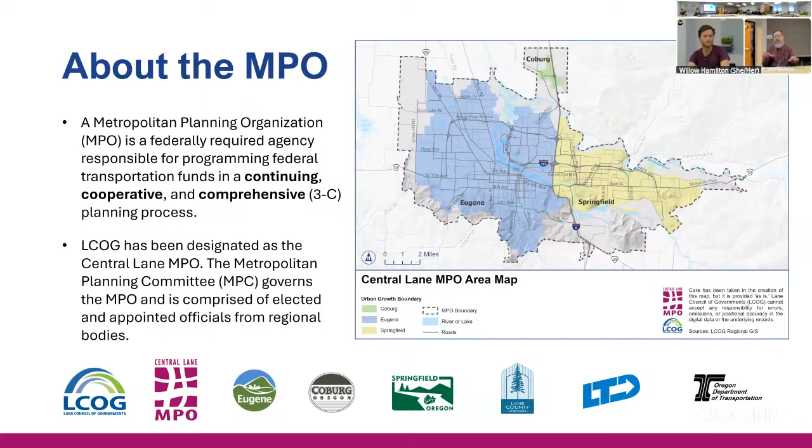So LCOG has been designated as the Central Lane MPO. That happened back in the 70s, and we're governed by what's called the Metropolitan Planning Committee, MPC. It's comprised of elected and appointed officials from the region. We have board members from Eugene, Coburg, Springfield, Lane County, Lane Transit District, and representatives from ODOT are there as well. For the city of Eugene, your mayor, Kaarin Knudson, and Councilor Randy Groves are the two representatives on that board, but there are also other committees associated with the MPO that has staff on there, like Rob. So there's a lot of input from the local agencies on what activities we do.

So why are we counting bikes and pedestrians? The number one reason is to understand how people are traveling around the region. We have a lot of history counting where vehicles are going around the region. Counting bikes and peds is something that's a little bit newer.

One of the priorities that's been noted by MPC is more safety, which comes as no surprise to this committee. One of the ways this helps with safety is to understand what that exposure is to bicyclists and pedestrians on our transportation network. If we know where they are, we can get a better sense of where we should be putting interventions. The bike ped counts also supports grant funding applications for discretionary grants.

Those are funding sources where you have to put in an application and compete against a statewide or federal setup, as opposed to what's called formula funding, which just comes to the region or the state and we get a set amount that we know about.

There are program reporting requirements. CMAQ is congestion mitigation and air quality, that's another acronym. That is a funding source intended to help address vehicle congestion and associated air quality impacts. As part of applications and reporting for that funding source, you need to demonstrate that you're actually reducing congestion and dealing with air quality. Having bike ped counts for the area, either before or after, help with that reporting requirement. These counts also help with outcome evaluation.

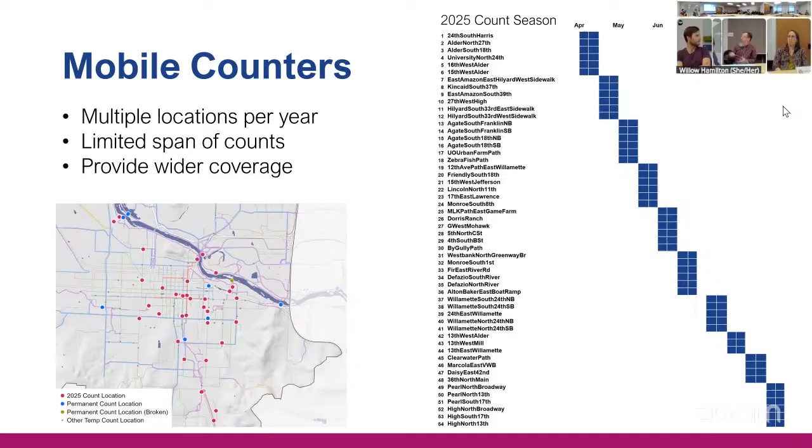There's a little map on the left of the count locations we did in Eugene - we also counted in Springfield. The mobile counters are really helpful in that they let us count on a lot more facilities, but we get less data each time we do. We have a rotating list of locations for the mobile counters.

It was initially put together in 2016, 2017 to help with model calibration. Our staff member, Josh Roll—which I feel is the best name in transportation planning, combining both Josh and Roll—now works for ODOT in their transportation planning and analysis unit.

He did a lot of great work for LCOG. What he did is look at a bunch of regional streets of all types and try to pick a representative sample so we could count everything from a quiet neighborhood street up to busier streets with maybe a striped bike lane, to get a sense of how people were using different types of facilities around the region. We've generally been rotating through that list.

We've had to make some adjustments over time. The mobile counters have to be placed carefully with thought. One of the things you have is this little box that holds all the hardware, and that's got to be attached to something so it doesn't just walk away. Over time those anchor objects have disappeared—sometimes trees get cut down, sometimes a sign gets moved, or the road gets reconfigured, or the surface deteriorates and becomes too rough. Or we just find a particular location is, for whatever reason, subject to more issues than others.

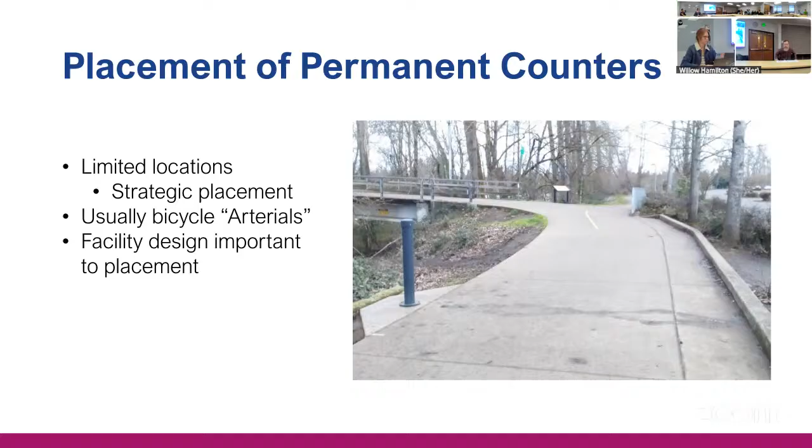Josh, I was wondering how sophisticated are these detection devices? Can it detect something like a bike trailer, or can it tell the difference between multiple bicycles going across at the same time, like if they're going parallel?

Yeah, they're fairly sophisticated, though it depends a bit on which counter we're talking about—the technology has improved over time. We have one mobile counter that will actually count both bicycles and vehicles and is really good at capturing the difference. Most of the other ones are really good at bicycles but not so great at things like skateboards, or a bicycle that's a long-tail with a longer wheelbase—sometimes those don't count as well. But they continue to improve them.

When we get to the end of the presentation, I can talk about some of the newer technology options we might be able to upgrade to, if we're interested. Thank you. Alan?

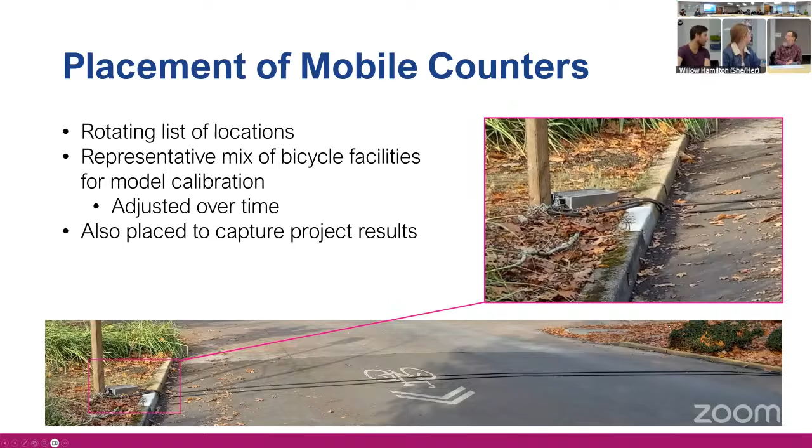So I'd say that in a few key locations, expanding permanent counters makes a lot of sense. But the mobile counters let us be a lot more nimble and go where the interest is for the next planning project, or model changes.

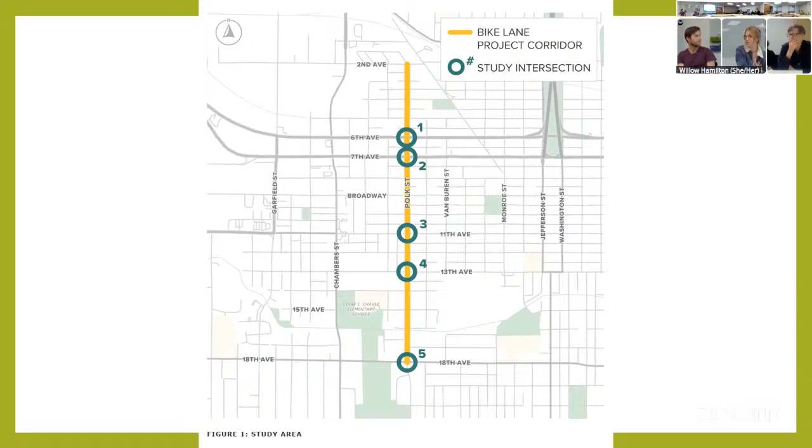We looked at 5 intersections: 6th, 7th, 11th, 13th, and 18th. Those are the 5 signalized intersections on Polk Street. Each of them has a turn lane. So this is Polk at 6th - here's where there's the through lane and the left turn lane to get onto Polk, and then here there's a through lane and a right turn lane to get onto 6th from Polk. So this would be the space where if we need to put a bike lane here, we'd have to have a through and left turn lane to create space for a bike lane.

Same on 7th, but different direction. So, the light at 6th and Polk and 7th and Polk is so short - do you guys take that into account, like two cars get through and the light changes, and then you're sitting there for a long time? And for a bike or a pedestrian, same thing - you're begging the button. So do you guys take into account the time people are going to have to wait to get across these pretty major streets?

Yeah, so that was part of the traffic analysis - existing timing. When they gave us the intersection report, just to zoom out for a second, we have not made any decisions on this project or what to do with the intersections. We have gone back to DKS with requests for further analysis - your point exactly, like what would happen if we change the signal timing? Because it is really short. And if it's really short and now there's more cars in a single travel lane instead of two lanes, or bikes in the middle, what does that all look like? It's all modeling, so nothing's a perfect science, but we've sent it back to DKS for further analysis, and I can review what that analysis is.

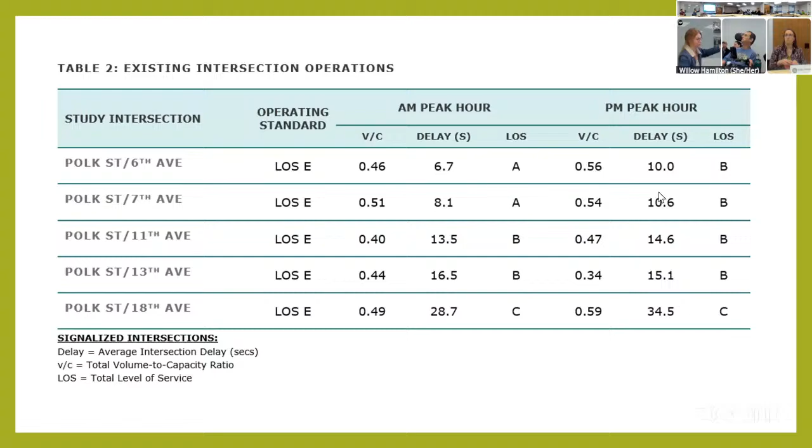So this is existing intersection operations. This is a little wonky, but the operating standard in Eugene is that our level of service is E. We basically try to make sure all of our signals are meeting at least E. The one thing that can be below that is F. If a signal intersection is F, that doesn't meet our operating standard. So we're always trying to get them at E, the minimum.

Currently, Polk at 6th, 7th, 11th, 13th, 18th are A, A, B, B, C for AM peak hours. The level of service, the letter, is just basically the amount of delay that vehicles experience. So that's why you see 18th has 28 seconds of delay, it's a C, whereas 6th is only 6 seconds, as an A.

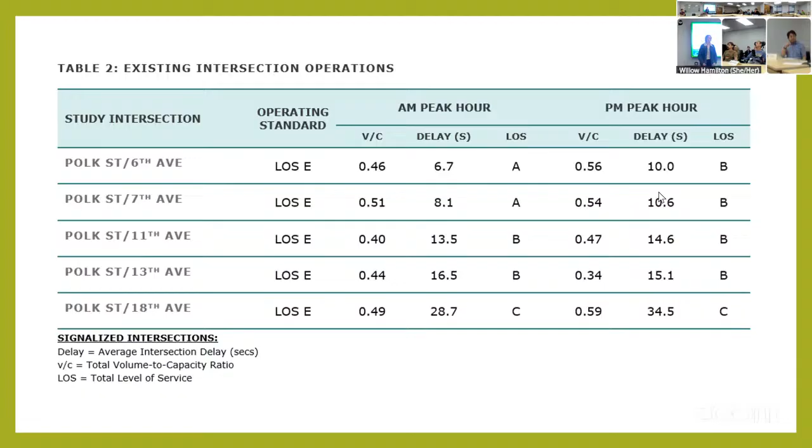So that's really what it's based on. They kind of relate to each other. In the morning, people have about 6 seconds of delay, that intersection's an A. In the afternoon, they have about 10 seconds of delay, that puts it at a B. The 18th intersection is the busiest intersection on this corridor. It's kind of interesting that it just gets busier as you go south. That's what we saw with our volumes as well.

So this is existing conditions. It's because 18th is the only street that goes through all of town south of 6th and 7th. Yeah, totally. And 18th is like a whole other can of worms that one day we need to address.

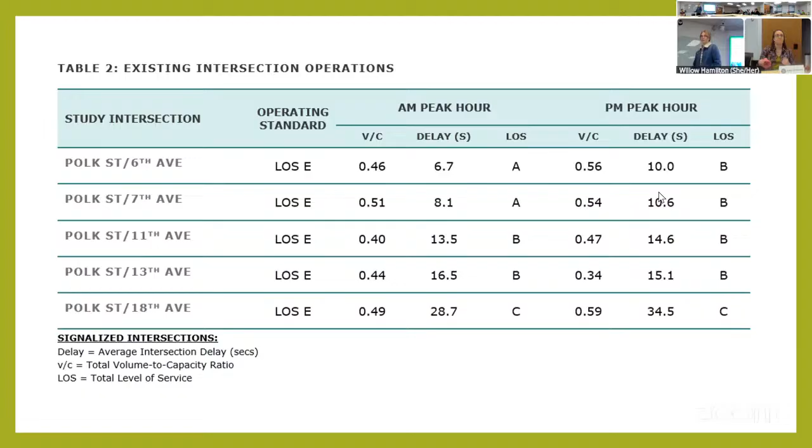Okay, so I just switched over. This was table 2 with the existing conditions. This next one is table 3, we call it build conditions, but what that means is, what we're asking is if we removed turning lanes, what would happen to the level of service for people driving?

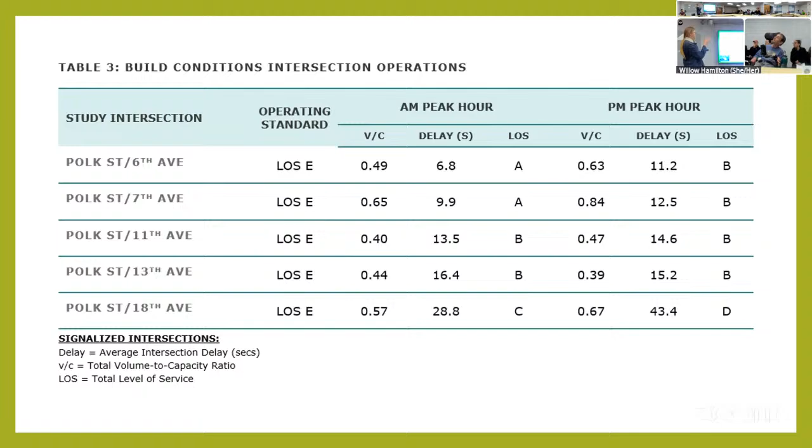We didn't see much change in the level of service. So if I flip back to this, AABBC, AABBC, the level of service remained the same if we were to remove the turning lanes, which came to my team as a bit of a surprise. Polk Street is not a major driving thoroughfare. It is an important access route, but we're not seeing super high volumes on there that would be impacting these.

This level of delay is averaged across all of the vehicles going through that intersection. So what that means is the north-south on Polk Street is being averaged with all the cross traffic here. And since there's a lot of cross traffic this way, it does bring that average down for delay.

So basically what we're looking at is kind of a green light, like we could probably remove the turn lanes, but we want additional analysis because the signal timing is really important. And right now the greens are so short that if we just pulled those turn lanes and didn't change the signal timing, it could create backup, and we don't want to do that. So how can we adjust the signal timing so that it's working the best it can for everyone?

And this is all contingent on if we decide to move forward with the bike lanes project at all. So that's all sort of coming together. We have pieces, but no decision has been made. Eventually, staff will put together a memo to leadership.

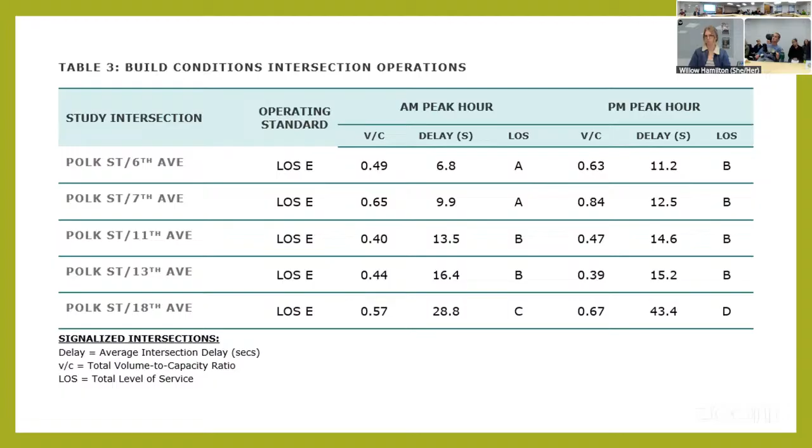We'll say here are our findings, here's our staff recommendation, and then leadership ultimately makes a decision on how the project moves forward. I think that's my update on Polk Street.

Is leadership the council? No, leadership is the city engineer - right now that's Doug Singer. I always get Doug Singer and Doug Rubel mixed up, but Doug Singer is the city engineer right now. Depending on how Doug feels about the project, it could escalate higher to the public works director, or even city manager or assistant city manager. That's as high as it could go.

Good question, but not council - council doesn't typically make decisions on transportation projects. Do we have a public works director now? We have an interim public works director - Lacey Ridsdal is the interim public works director.

Well, thanks, Willow. Just wanted to keep you all in the loop on where we're at with Polk Street. It's good to know, and we'll continue to be interested in how it moves forward.

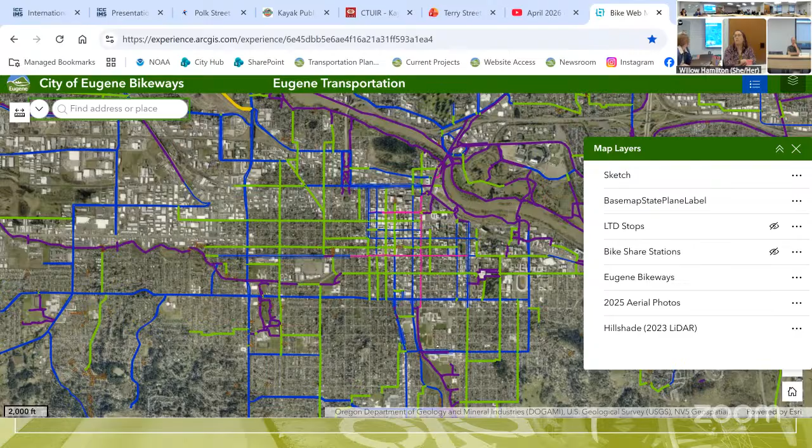My question for you is, are you thinking about how you're connecting to something like the Fern Ridge Path? We haven't had that conversation yet, but I think that's the question—how is that going to work?

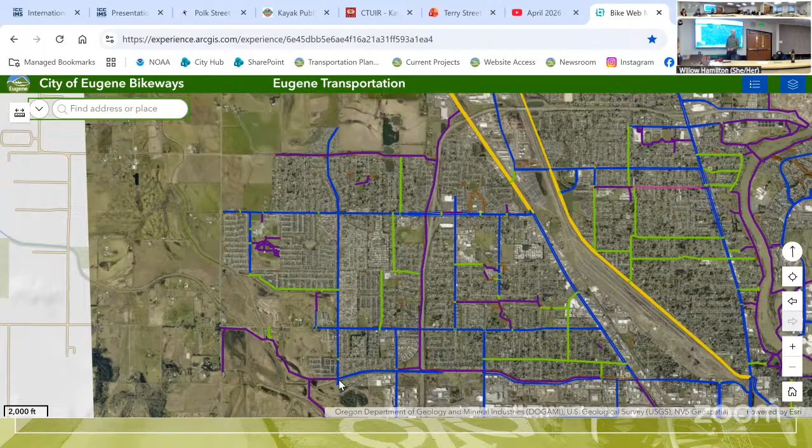The Fern Ridge path only goes to here, and the park is all the way up there, so that's a big gap. I think the question is, someday there has been talk about extending the Fern Ridge path—that's something we'll talk about as part of the transportation system plan. That would be really expensive, and maybe more of a recreational connection, though it could tie into some of the neighborhood here.

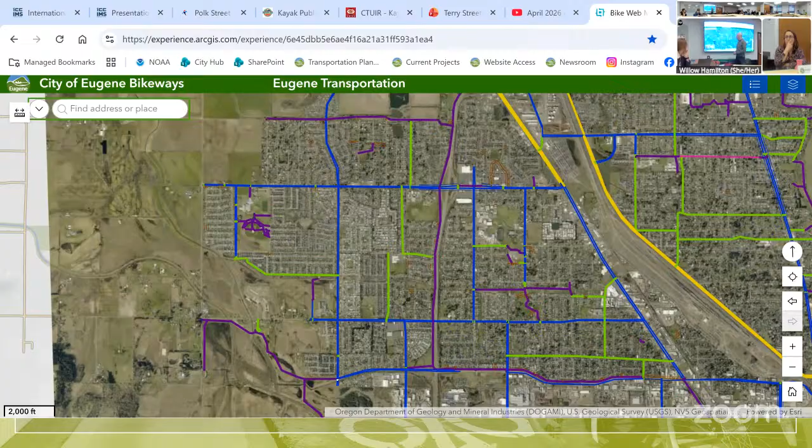Here's the road where the clicker is pointing—Terry Street already has bike lanes, though it's not particularly friendly for cycling since it's not protected and carries a lot of traffic. There are some weird chicanes on it that, even though they're generally considered an enhancement, may not feel good, so we could look at improving that.

I actually did a weird rotate there, oh my god. Right, a whole lot.

Move on to Carl's question, or are you trying to point something out there? No, let's just move on. Trying to pan and then deciding to rotate instead. We could just go back to the sliders.

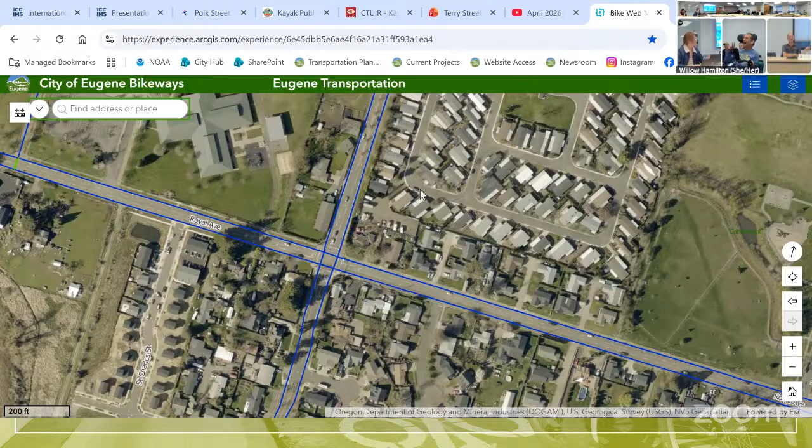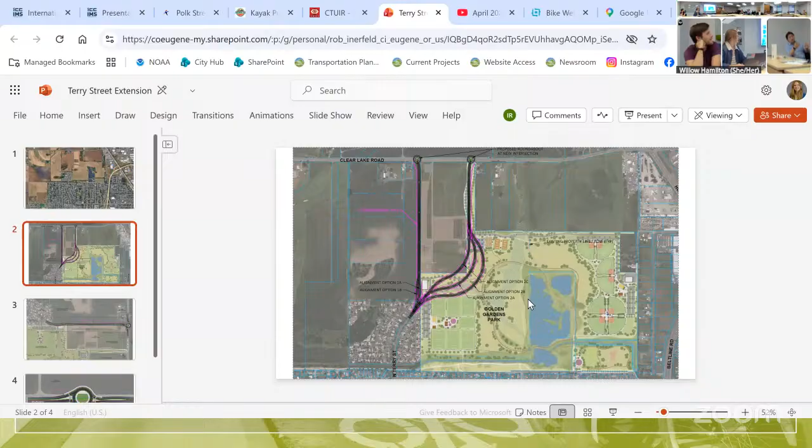Carl, what's up? First, I want to give credit to Rob, who was very persuasive and got me to join ATC. But my question was, if you could go back two slides - yeah, this one - were you proposing it's one or the other, like there could be one more direct path going from the park and Terry Street, or could both of these exist at the same time?

No, we would only pick one of the alignments. I think the parks folks probably want us to pick the one to the west, because that doesn't cut through the areas where they'd like to see park. There might also be, I'm not sure, but I think this cross section is actually wetlands, which could be more problematic because the street would have to go through wetlands, whereas if we just go straight north. So there are pros and cons, or even obstacles, for each of them.

If you're looking for feedback, I'm always a pro person when it comes to having some kind of shade or greenway situation, even if it takes me a little bit longer, just because on the days where I really need it, that helps a lot. So if that's feedback, that's mine.

Well, street trees are definitely something we integrated into the street design, and there are great street trees along part of Terry leading up to this. Oh okay, because it actually being on that street - it just looks so desolate to me. I know, right? Beyond the end it's just fields, I think, but up to that point it's good.

Can I ask one more quick question? Sure. Is this - I think I heard someone say this could be part of a plan to eventually get to the airport? There are plans to continue Terry all the way up to Airport Road. Oh okay, great. I'm a little dubious of that, just because you have to get through some of those industrial properties. Just as an aside, Lane County I'm pretty sure got funding from the MPO to do a safety study of Green Hill Road, so that's something else that's going to be happening.

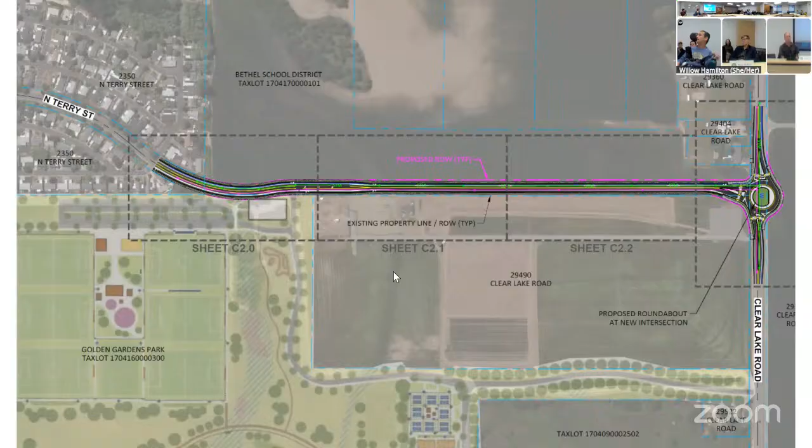So, I have a question, and maybe the best way to do it is if we go back another slide - yeah, this one. This area in a way already has some great bicycle connectivity, things that weren't mentioned earlier. You have the Justin multi-use path here, which connects the Beltline all the way across Terry Street and beyond.

You've got the Beltline path that comes all the way up here to Jerry's. Terry Street goes down, as we saw earlier, and connects at Roosevelt - not right there, but another couple of blocks up past Beltline has a separated, protected path. And then, of course, it connects over to the Fern Ridge path too. Terry Street, as a whole, is really this key north-south artery tying together, kind of completing a square here, as a major arterial area around the northwest.

Plus, this is pointing into this Greenfield UGB expansion, and it just seems like a real opportunity to think about how we can have - these other paths are all protected - how can we have a protected experience on this one side on Terry Street?

I also think about two other things related. One is - someone just mentioned this is a long way out here, it would be a long ride - but it's not if you live in Bethel. If you live in Bethel, you're right here. And in fact, if you live in Bethel and worked at the airport, it's actually a relatively easy bike ride to get there, if you could, from Bethel, which right now is kind of hard unless you get out to Green Hill Road and ride on that.

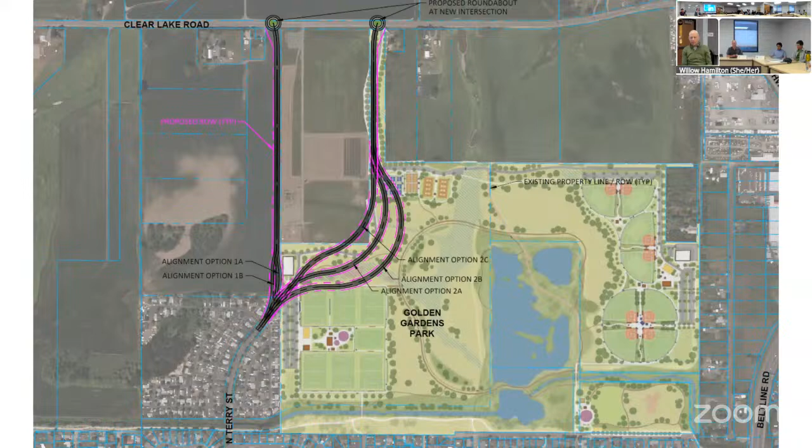Beltline Bike Ped Bridge. So some of you may have heard, we had big plans to build a pedestrian bicycle bridge over Beltline to connect North Eugene High School to the Santa Clara neighborhood. The costs kept going up to the point that even though we had some grants, we didn't see a path forward to being able to afford it. There were also challenges around needing to acquire private property to basically tear down and build a connection to the neighborhood street. So our leadership decided that we couldn't move forward with that.

But we identified that there's actually an undercrossing at Beltline a little further to the west, about half a mile further west. So we're actually looking into the idea of building an undercrossing at Beltline that's for walking and biking rather than an overcrossing. We're trying to get funding from ODOT - trying to take the much larger grant of $6 million that we're going to have to give up to do a smaller feasibility study to see if it's viable to do this undercrossing. If they say no, we might just use city funds to do it.

And then we'll find out. I did speak to a joint meeting of the River Road and Santa Clara neighborhoods that was looking at their neighborhood plan implementation, and people there were supportive. Actually, there was a guy there who works for EWEB who said he doesn't live in that neighborhood, but he has friends who grew up there and they used to bike or walk under Beltline.

There's like a little creek there, so it's always hard to build a bike path next to a creek because creeks flood. But there's a little creek there, and that's why there's a bridge basically that has an undercrossing. Shane MacRhodes and our team actually went under it several years ago, and he was starting to scope out this project. But since then, ODOT has fenced it, probably because there were unhoused people camping there. But we're still - Catherine and our team just sent an email to the ODOT staff person in charge of maintenance, so we can try to get a better understanding of whether they would allow us to even look at doing this.